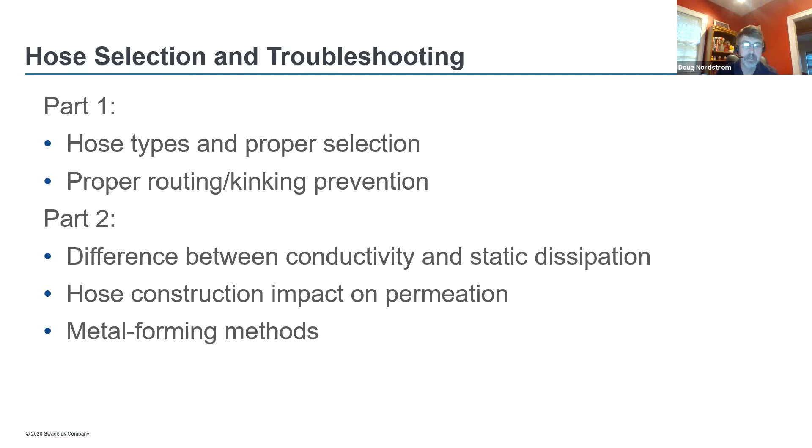We have a two-part hose selection and troubleshooting training class. We're doing part one today, where we'll talk about various hose types and proper selection. We start off relatively simple, then talk about what kinking is in a hose and how to properly route one. The next part, a few weeks in the future, will be more detailed and technical, covering the difference between conductivity and static dissipation, and different construction methods for creating hoses—one with softer materials on permeation, and one with harder materials, metal core hoses, and how those are made and perform differently in different applications. So today we're covering the part one topics, which start off relatively simple but do get a bit technical.

So just to start off, why does hose selection matter? It amazes me how often hose selection isn't really thought of as being a very serious or important thing with a fluid system, when in actuality a hose is a very important product.

It's the wear item of a fluid system, and usually one of the more common failure points. These failures can be very serious—they lead to downtime, which can be costly, they can waste product, and more importantly, they can be very dangerous. An improperly selected hose can cause bodily harm or death. Really understanding the application and selecting the right hose for the job is a critical aspect we take very seriously. We say failure is not an option, taking into account all the application parameters when selecting the right hose.

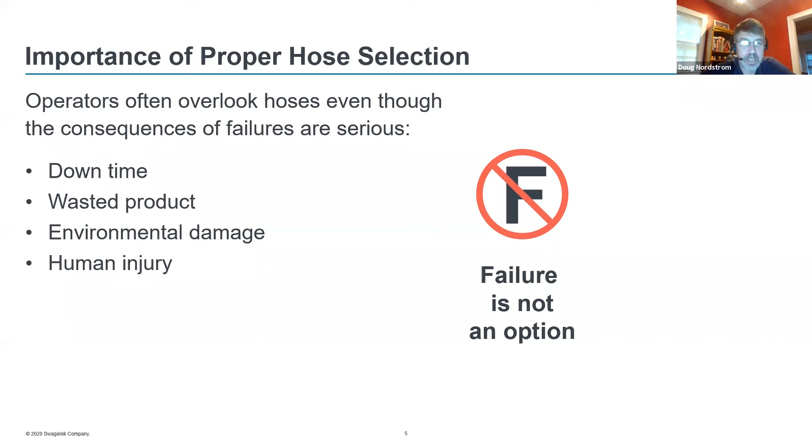The analogy I like to use, and I talk about this quite a bit as the hose product manager, is that no one buys a new car without planning on doing routine preventative maintenance on the tires. Everyone understands tires are a wear item—they need to be rotated, pressurized, and changed when they go bad. Otherwise, bad things can happen.

We get the question all the time: how long will a hose last? Well, I say, how long will a tire last? It depends—on what kind of roads they're driven on, how fast and how drastic of a driver you are. Same thing with a hose. We can't really determine how long a hose will last, but we've learned that hoses last a very predictable amount of time in the same application. So it's always important to start a preventative maintenance program and collect data on how long a hose will last. We can help determine how worn a hose looks, similar to a tire, to create that data and ensure a safe environment for all work associates around hoses.

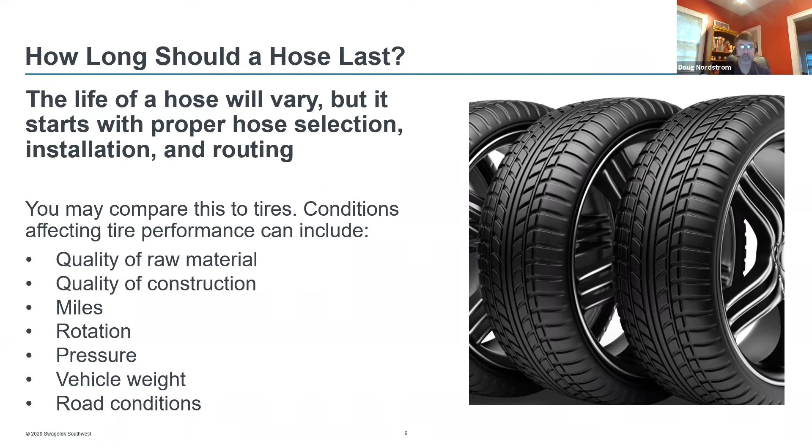So with that said, we're going to jump into different hose types and proper hose selection with these types. This starts off fairly simple, but what makes a hose and not a tube is that it's multi-layered. A lot of people think hose means it has to be flexible, but that's not necessarily the case—there's flexible tubing out there, and some hoses tend to be fairly rigid, not very flexible. So really what makes a hose is that it's multiple layered.

But the braid gives the hose its pressure rating. A core material typically can only withstand 30, 40, 50 psi, whereas once it's braided, hoses can withstand thousands of psi depending on the braid material.

The braid many times is covered. It doesn't have to have a cover, but many times it's covered to protect the hose, protect the user from maybe damaged braid wires injuring an individual, or also making the hose more cleanable. The cover is very easy to wash down, so the outside of the hose can stay clean. And the cover can also provide some abrasion resistance to allow the hose to last longer if it's being dragged along the ground or rubbing up against something. So again, the cover needs to be taken into consideration.

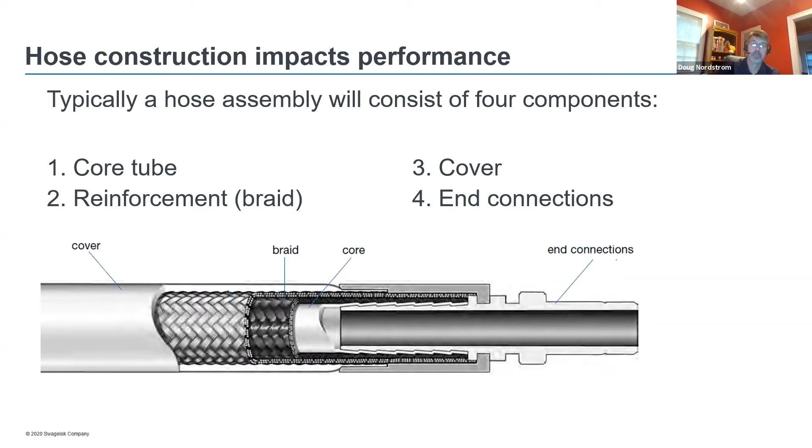So what we say is we like to select a hose understanding the needs of the application from the inside out. That's what we're getting to here in this slide. So if we're looking at a cross section down the center of a hose, we always want to consider the core tube. What does the core tube need to withstand? What is the core tube media going to see? How much reinforcement is needed and what type? How much pressure is needed? What does the reinforcement need to be able to do? What temperatures is it going to see? What cover, if any, are needed? And then, of course, what end connections are needed to be able to connect it to the system. So all these four need to be considered when selecting the right hose.

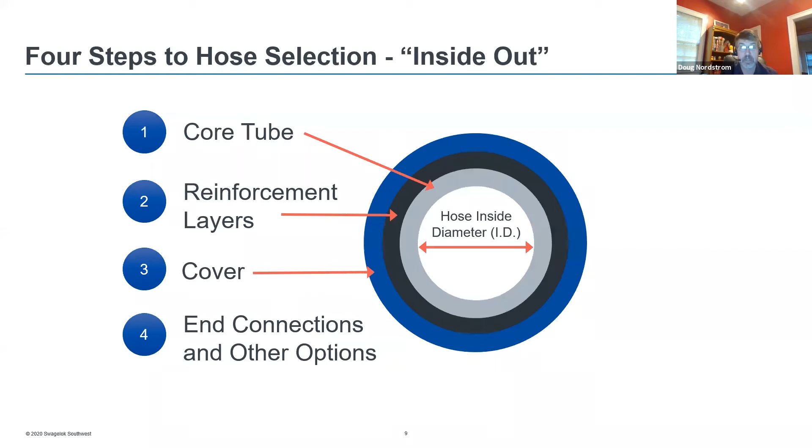So how big does a hose need to be, of course? What temperature is the hose going to see? First of all, media temperature or outside temperature, because that can come into play with what the core tube sees versus what a braid or cover is going to see as far as temperature goes. What kind of application is it? Is it dynamic? Is it static? How much is the hose going to be dragged around or moving? And then what media is it going to see? What does the core tube need to be chemically compatible with? What's the pressure going to be? What are the end connections? And then also, obviously, what kind of delivery is needed? Is anything special needed for the delivery of the hose? But all these need to be considered when looking at those four layers I mentioned before: the core tube, the braid or reinforcement layer, the cover, and the end connection.

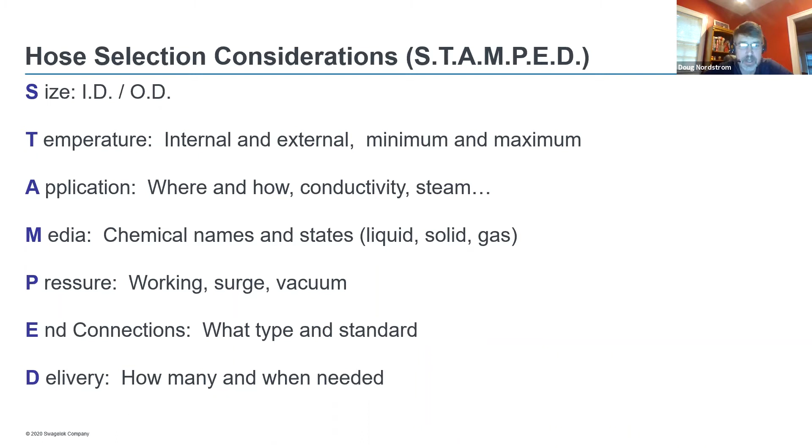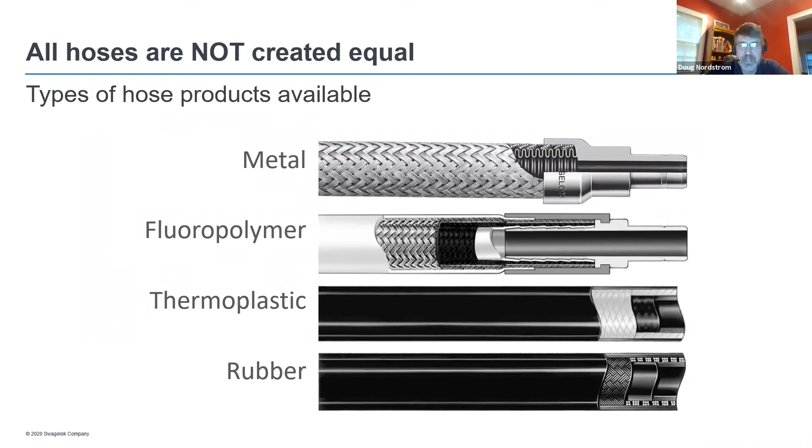PTFE fluoropolymer is a good compromise - it has good chemical compatibility with almost anything, and it allows for cleanability because of the smooth bore. It does permeate some, and it runs into an issue with static dissipation, which again is a part 2 topic we'll get into. But you need to be careful when specifying a PTFE core hose without static dissipation - it can cause leaks very quickly.

The nylon or thermoplastic hoses are mainly designed for hydraulic applications. They're very rugged and take pressure impulses. Rubber is very durable - you can run it over, you can stand on it, and most of the time it's going to last for a very long time. But these softer materials won't have the same temperature and pressure ranges as the harder metal materials.

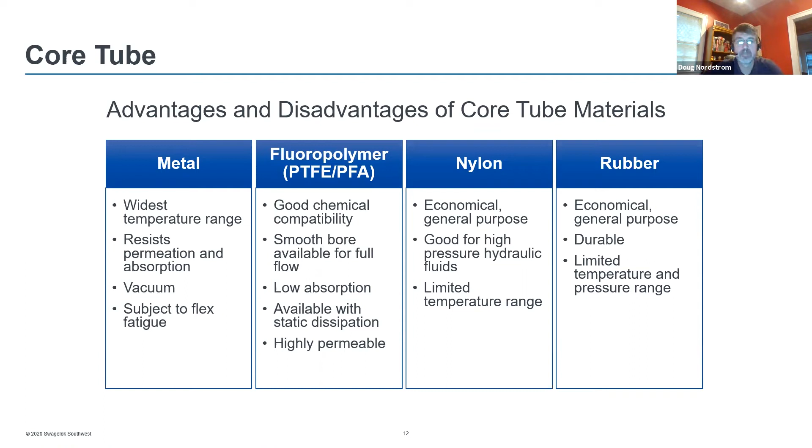This is intended to be a cheat sheet showing advantages and disadvantages of the types. And this is something where we see the wrong hose in the wrong application very often. It's not an indicator that it's a poor quality hose, but if we take a metal core hose and put it in an impulse application where pressure spikes happen very commonly, the metal can't absorb those pressure impulses like a PTFE, Teflon core, or thermoplastic core hose. So even though that could be a very high quality and high priced metal core hose, it won't last very long - it's just the wrong hose in that application.

So it's important to really look at all these different characteristics when selecting the right type of hose. And of course there are multiple hoses in each type, so selecting the right hose can be a difficult thing to do, but it can really extend the life of a hose in an application by 10-fold, 100-fold of what the wrong hose would do.

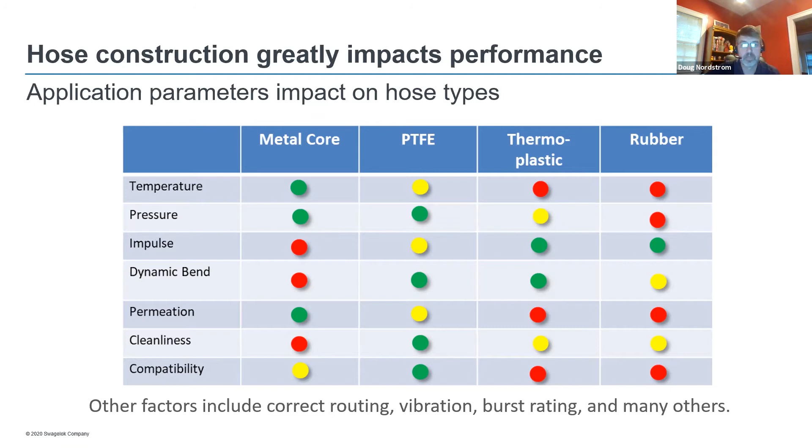The same applies when looking at braid material. So far I was just talking about the core tube. With braid material, there's a lot of engineering that goes into the braid of a hose. I wouldn't have thought it before my time working as product manager for hose, but a lot of engineering goes into designing the right braid.

On a PTFE or thermoplastic softer core material, the hose wants to grow in both length and diameter. Because of this, the braid needs to support the hose in both directions, changing the braid angle depending on the hose design and size, but it tends to be more 53 to 55 degrees. These are very important things to understand when selecting the right hose.

Braid material is going to impact the temperature rating of the hose, and it's going to impact the price of the hose. We also have what we call a braid package, which is the wire size and count. There are different wires to use when braiding - of course, the fewer wires, the less expensive the hose will be, but they need to be thicker wires, and therefore that will be a much more rigid and less flexible hose. The more wires, the thinner the wires can be to achieve the same pressure rating, but the price will go up.

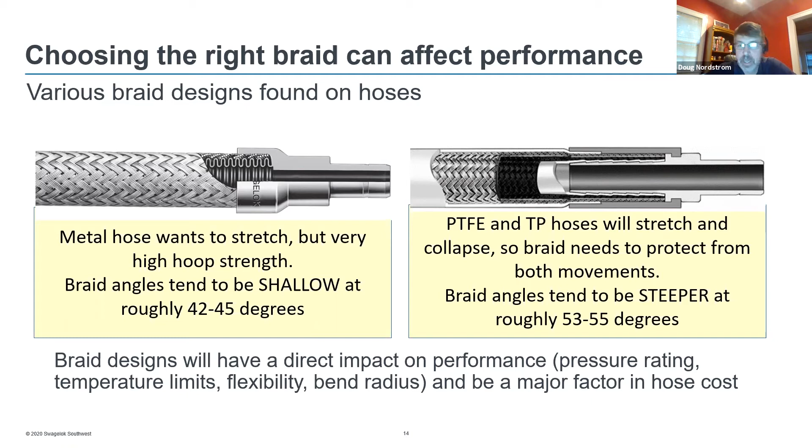Some quick examples of this. Again, there's a lot of expertise that goes into selecting the right hose. Because of this, Swagelok has established a group of what we call hose advisors. They're highly trained sales and service center associates able to go out and help select the right hose. So if this seems like a lot of information, don't worry, we have people that can help you out.

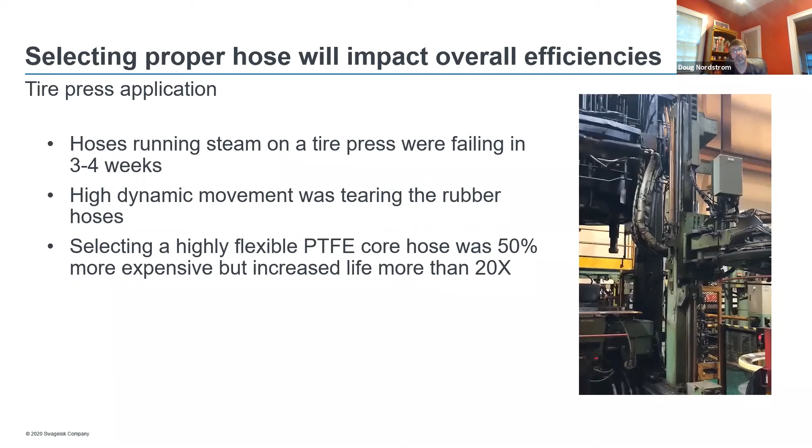And it has not failed. So just one example of taking out a perfectly good rubber hose that was just put in the wrong application, and putting in a hose that's a little more expensive, but has now lasted over 3 years. So of course it's a better solution for that application.

I spoke at the beginning about how hoses are a wear item, and I can't stress that enough, but just planning for the right maintenance schedule will lead to incredible savings. Hoses are a soft material and they will wear out just like tires. Planning for the right maintenance program and schedule will make downtime less expensive and at a more convenient time for the operation. We've seen users of our hoses save hundreds of thousands of dollars annually because they can plan for the right rebuild schedule of their system.

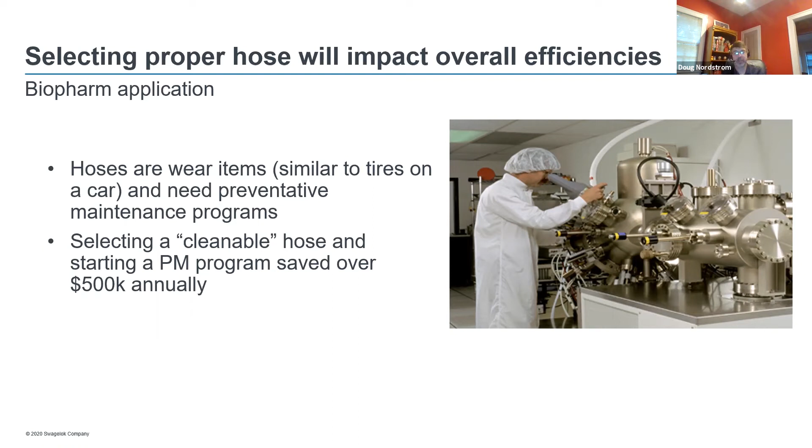Something else we like to stress is that hoses are a very commonly handled component. We don't go around and handle tubing very much because it's rigid, and we don't handle fittings because they're rigid and stuck. But hoses are very commonly disconnected, connected, dragged around. For that reason, we need to make sure we plan for associates to handle hoses. Braid wires can become sharp if damaged, and that needs to be considered.

For this reason, hoses have a lot of different accessories readily available, things like insulation so the outside of the hose is safe to handle, and different guards to protect users from braid wires, or to protect the hose from rubbing against a corner or whatever it might be. So those things need to be considered when looking at how often a hose is going to be handled.

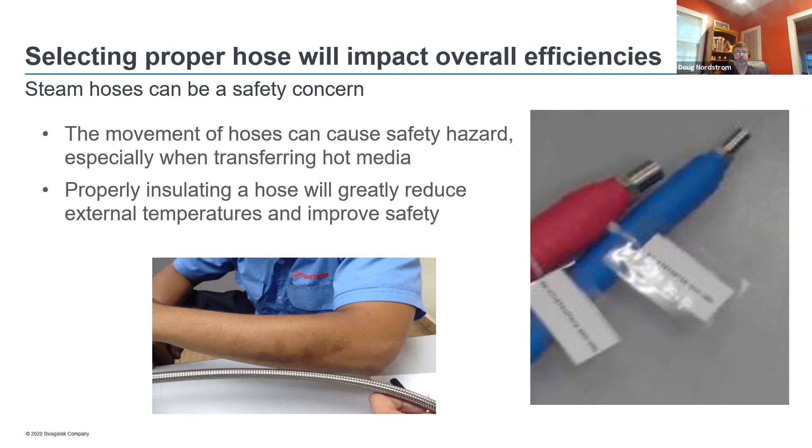So at this point, are there any questions before I move into our next topic? I don't believe so. Nope. Okay.

So the next part of today is we're going to talk about hose routing and how to prevent kinking. I think we all know what a kink is in a hose. We all have garden hoses, I'm sure, and we all go around and kink the hose to get your little brother to look in the end of it, then let the hose go and he gets all wet. That's fine with a garden hose, but in a general industrial hose, it's actually a very dangerous thing to do.

Here are some examples of hoses that have obviously been permanently damaged. The concern with doing this, unlike a garden hose, is that there could be something dangerous inside these hoses, and the hose has been permanently damaged to the point where it no longer maintains the same pressure. We've proven this in our labs where we kink a hose and burst it, and it does not maintain the same burst rating. So it can become a safety concern.

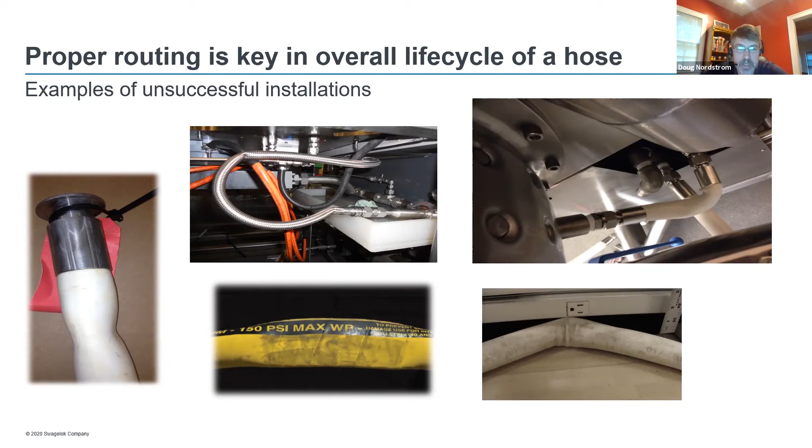Just to make sure we're all on the same page, kinking means you've bent the hose beyond the point of elastic deformation, so it's now plastically deformed. As the hose bends, it becomes oval, and that stretches the material more and more to the point where the sides of the hose are permanently damaged.

This can be a concern because with a garden hose, we can straighten it back out and massage it back into a circle, and it looks fine. It looks like it's never been damaged, but that plastic deformation has still happened. It might look okay, but it does not maintain the same pressure rating, and depending on how much damage was done, it could burst prematurely. So it's a very dangerous thing to do, and people don't normally think of it as a big deal, but it really is.

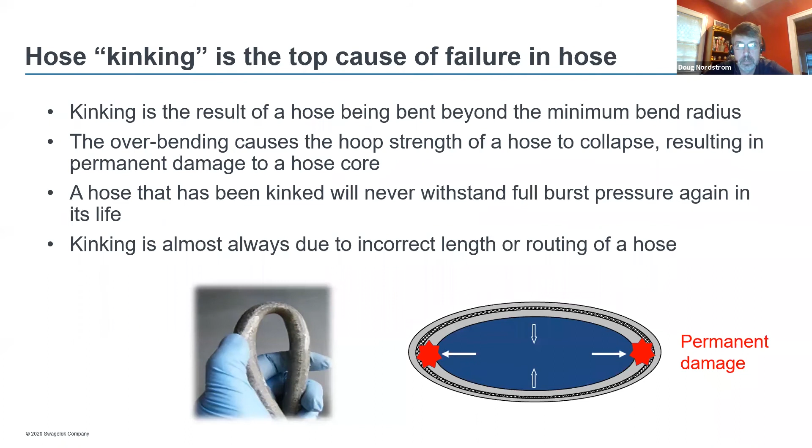A very common place a hose kinks is right at the end connection, for reasons like you see in this picture. So we always say allow for a certain straight length at the end connection before a bend starts. Then there's the maximum bend, or minimum bend radius, the most you can bend a hose, which is always listed by every hose supplier. We call that the minimum bend radius.

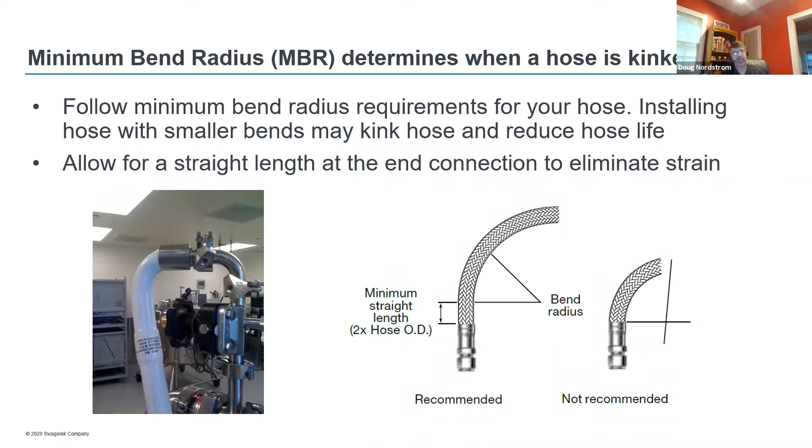It's important to understand that if you bend the hose smaller than that radius, the hose will be permanently damaged and no longer maintain the same pressure rating we list in our catalog. So if you maintain radii larger than what's listed, you will not damage the hose.

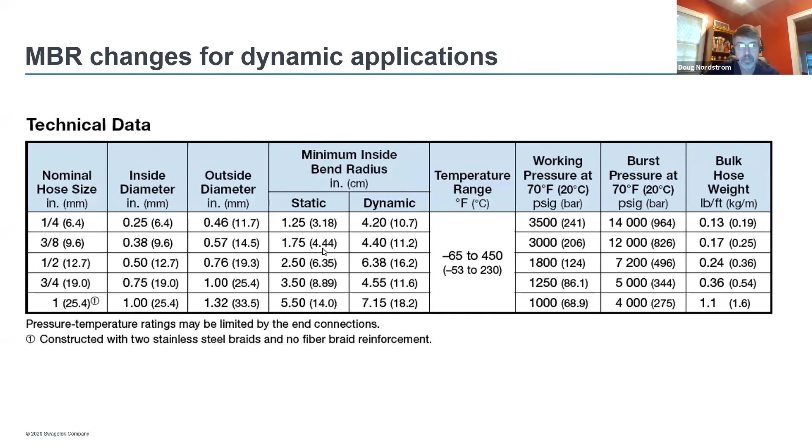So how do we determine minimum bend radius? There are various ways to do this.

On a metal core hose, which has a convoluted core, as you bend the hose more and more, on the inner radius of that convolution the peaks become closer and closer. When those peaks touch, we call that the minimum bend radius. We don't want those peaks to push into each other as you bend it further. That's pretty straightforward on a metal core hose, that's how we determine that one.

On a soft core hose, like a Teflon core, what happens is this ovalness you see in the picture, and we continue to bend the hose with a marble that's 80% of the original diameter. If the marble rolls through the hose, it hasn't been overbent. Once that marble gets stuck because the hose has been bent too much and gone too oval, that's the minimum bend radius. That is our method of doing it.

There is no industry standard, so when we determine these bend radii we take a fairly conservative approach. We want to make sure the hose was not damaged, and we feel this 80% marble rule is a nice, safe approach. Everyone could do it differently, so it's always important to understand how minimum bend radii are determined.

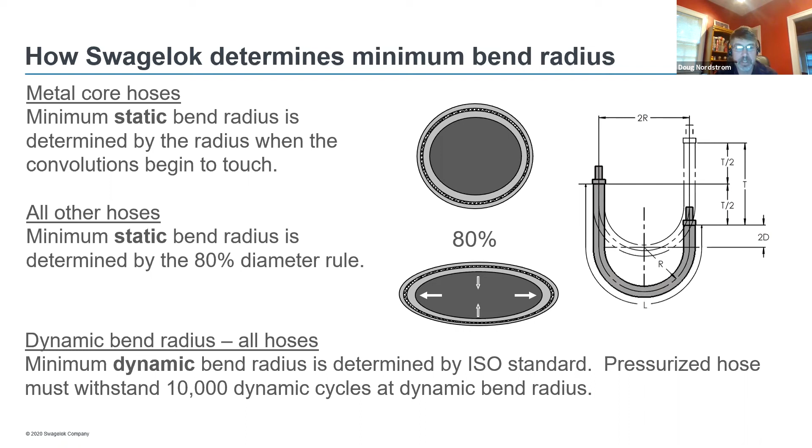We want to make sure we look at hose routing. This is a very common poor routing technique we even have sometimes on our own shop floor. It's very easy to connect a hose out of a horizontal end connection and allow the entire weight of the hose to pull down on that end connection. That will damage a hose much faster than you think, because 24 hours a day, 7 days a week, that entire weight is pulling down on the end connection.

And if there's liquid flowing through the hose, that additional weight will be pulling down on the end connection too. This is done most often because people are trying to save money on buying an elbow, but the hose itself will be damaged and need replaced far sooner, costing more than the price of that elbow. So look for these types of things, these are simple fixes and the hoses will last far longer.

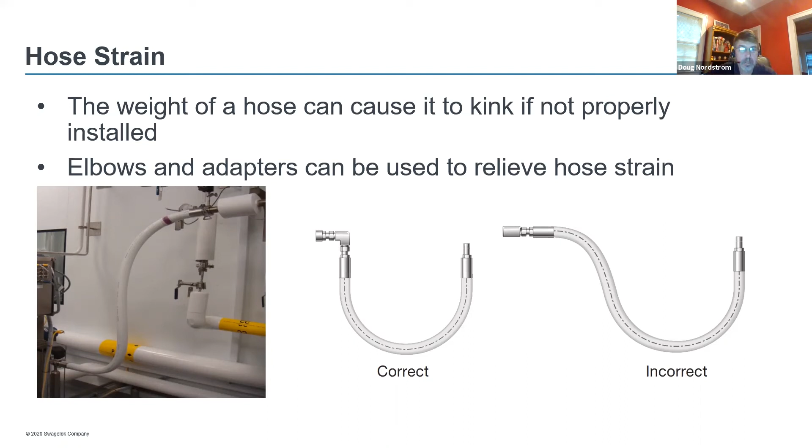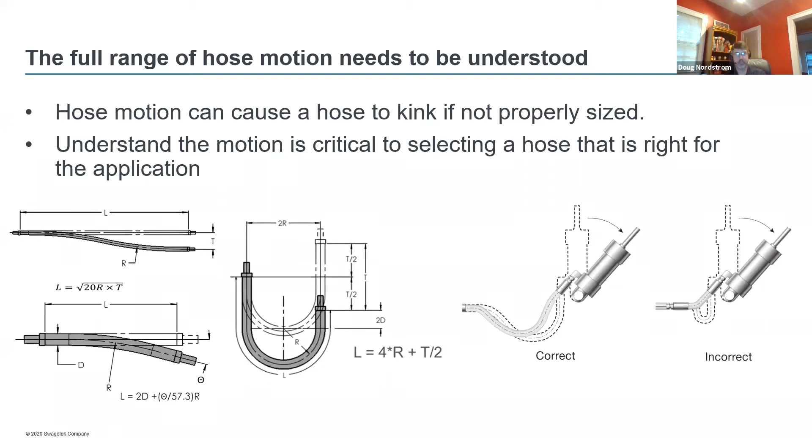Lastly, the fast death of any hose is twisting it. The core tube material, whether metal or Teflon, doesn't withstand twisting at all. The most common twist we see in any hose application is what we call bending in two planes. What this means is shown in the picture on the right, which is incorrect. That hose comes out vertically from a plate, twists around, and moves into a horizontal port that's moving back and forth. If you picture the way this hose is bent, if I disconnect it but maintain the same shape, it won't lie flat on a table. It's bent in two planes, putting severe twist on that bulk hose, on the core tube, and it will fail very quickly at the end connections.

A simple rerouting, like you see on the left, where we have a static hose—it could be tubing as well—brings that port up to the same plane. Now as that connection moves back and forth, it's only moving on one plane. I can take that dynamic hose, disconnect it, keep it in the same shape, and it'll lie flat on a table. This hose will last hundreds of times longer than one being bent in two planes.

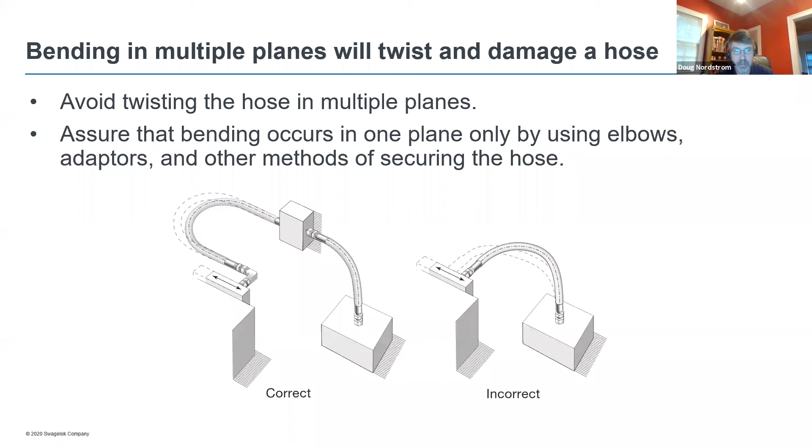Okay, so that takes us to the end of section 1. Again, we have a section 2 planned. We have a lot of additional training material on hoses because we understand there's a lot that goes into this—it's not just every hose is a hose. We have a class called Hose Essentials that we offer through your sales and service center. We have hose advisors who can come out and do any kind of service needed around hose recommendations. We have a group of global field engineers who are also well trained on all of this. And as I said, we have part 2 coming up in the very near future.

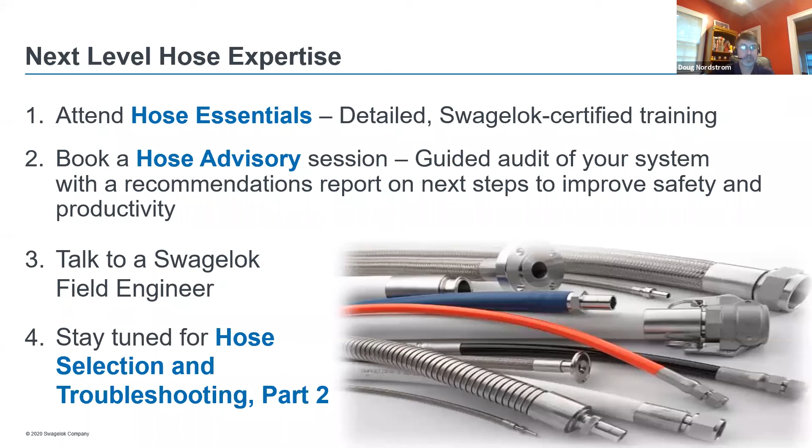To that point, part 2 is scheduled Thursday, November 13th at 11 o'clock, I believe, Pacific time. What we're going to go through during that are more advanced topics, I'd say: static dissipation versus conductivity, how to determine permeation in hoses, and how to maximize metal hoses for dynamic applications. And with that, Jen, I'd like to turn it over to any questions you might have received.